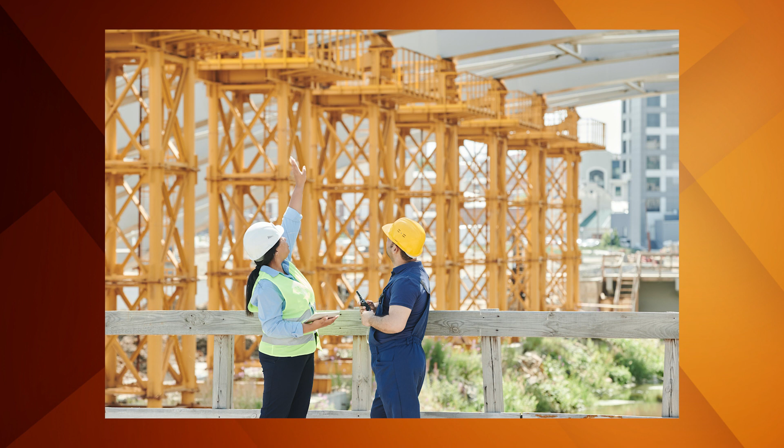They are usually the result of undue haste in getting projects approved and commenced in short time frames, with inadequate documentation which is not fully realised until well in the construction phase. Poor results are accepted at practical completion, as all the parties involved strive to finish what has not been an enjoyable experience and then move on. The poor results obtained are often explained away by suggesting there was some serious problem with the site soils and allegedly beyond anyone's control. So all parties take a loss in an effort to get the project completed.

How do we collaborate effectively when they won't listen? What we have to do is to make them want to pay attention. We have to offer them something worthwhile. We have to show them over and over again until it sticks. We know why projects get good results. When the right application is used, it is specific to the site we're working on.

Inland Rail Parkes to Narromine project, or P2N as we call it, is a great example of where these methods and processes have been implemented, achieving the results the clients expect. P2N outlines how VHR collaborated with the Australian Rail Track Corporation and the InLink joint venture between BMD Constructions and Fulton Hogan to determine and prove what was the right solution for the site to ensure initial and sustainable long-term grass growth was achieved in the poor quality soils. Large-scale civil engineering construction projects often have the problem of highly variable and poor quality topsoils.

We were contracted to revegetate the disturbed surfaces along some 103 kilometres of P2N's existing rail corridor, except for the capping, ballast rail and the single access track over a completed area of 2 million square metres.

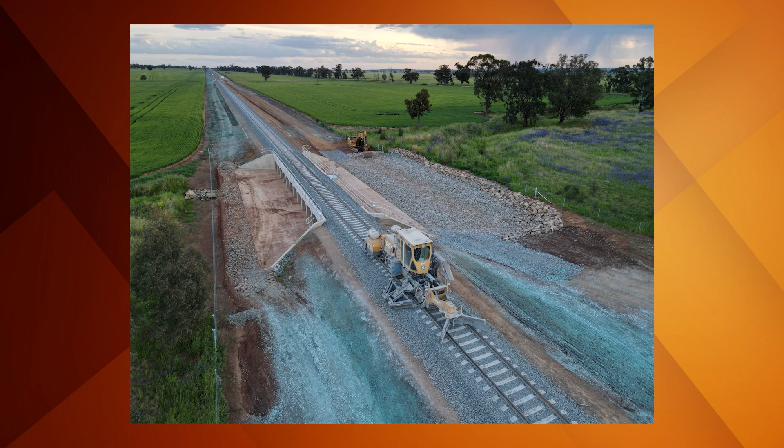Following acceptable results of the North-West link, the application methodology was adopted for the remainder of the works. The ability to ameliorate the soils in situ, along with preparing and covering large areas in a short time frame, became paramount in achieving program milestones.

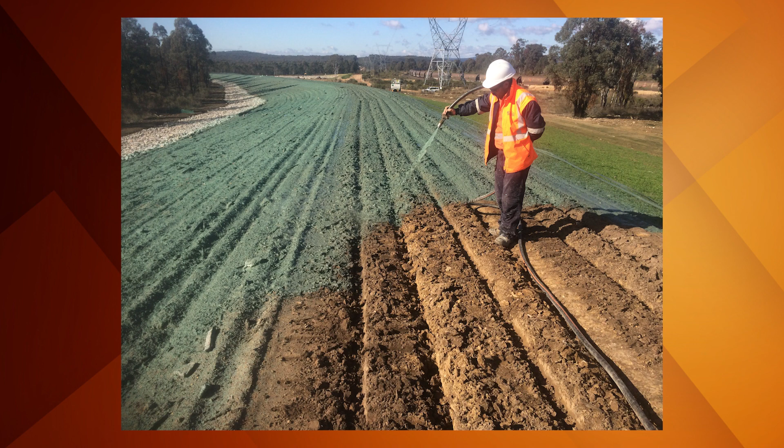The process and the method. The approach adopted was based on our experience on over 30 million square metres of applications since 2005. We commenced operations in 1981, and as our machinery and process developed, in 2005 we realised that results being obtained were unsatisfactory. So we developed a process and trialled it on the Brunswick Heads bypass. The trial was carried out collaboratively with the principal, the head contractor and ourselves, and the results achieved were acknowledged as one of the best outcomes for recent freeway developments.

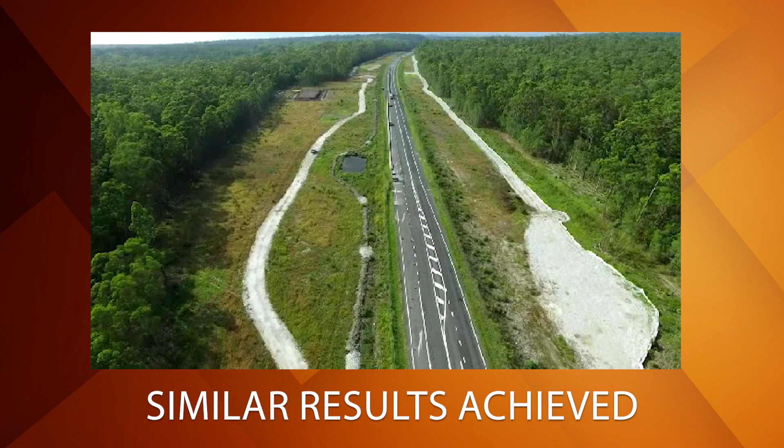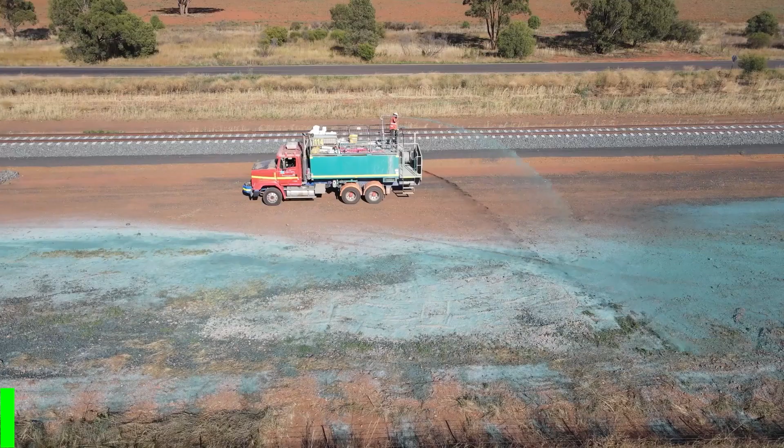The process was a simple one. Progressively testing the soils in locations over the length of the project where a variation in soil type was encountered and altering the mix to suit the results. Due to the scale of the project, it was not feasible to ameliorate in stockpiles, therefore the ameliorants were applied to soils in situ, requiring no manual or mechanical mixing in of ingredients.

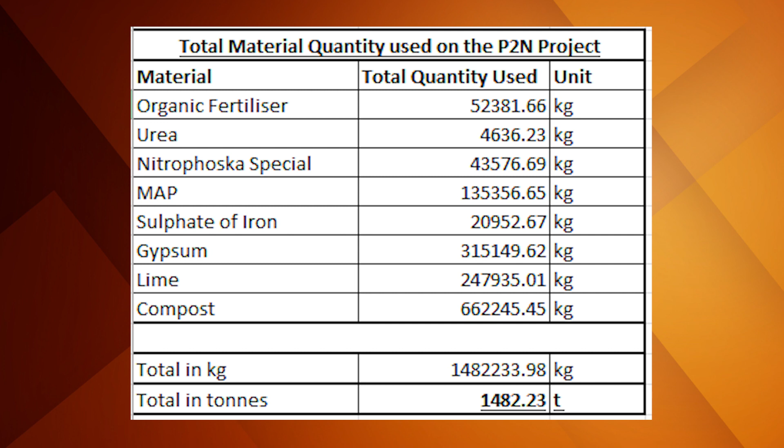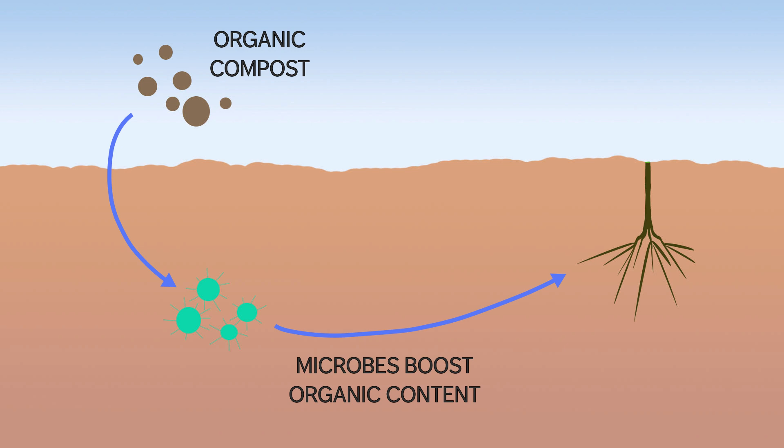This table provides data to give a better idea of the quantities required on this project according to the soil test reports. The application relied on the top-down approach in accordance with soil test results, and would incorporate fine and microfine ingredients to ensure penetration into the soil surface and to work their way down the soil profile as the root system begins development. This methodology saw the ameliorants included in the Hydromulch application infiltrating into the soil as rainfall was received.

All ameliorants and fertilisers used in this project are commercially available, such as microfine agricultural lime and gypsum and organic compost to AS 4454. Annual, perennial and native grasses, organic and inorganic fertilisers and other ameliorants as indicated in the soil scientist report were also included in the mix. Seed species and application rates for the project were developed in consultation with the ARTC and local agronomists.

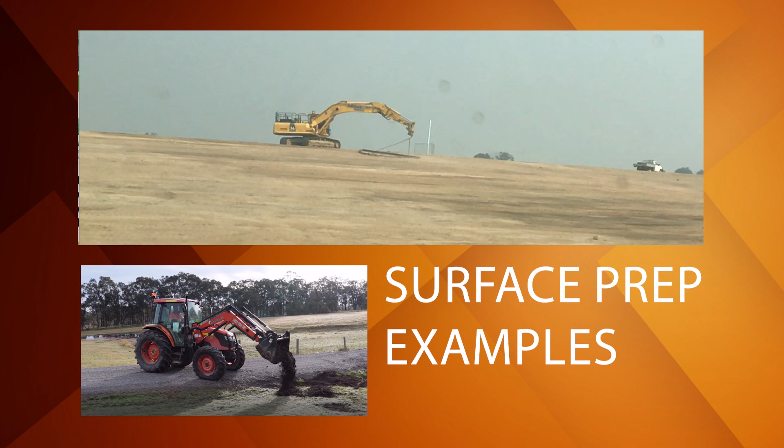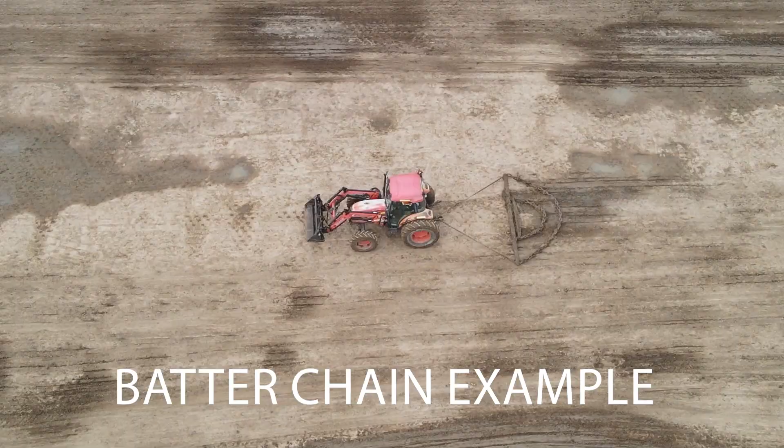Soil surface preparation was also an important part of the revegetation process. Site topsoil was spread on the furrowed, untreated subgrade in the revegetation areas and then lightly scarified to produce furrows parallel to the rail line to catch rainfall. Embankments on site were treated with a batter chain implement to loosen the topsoil to produce a moisture storage depth and leave furrows parallel to the contours for moisture retention and water erosion control.

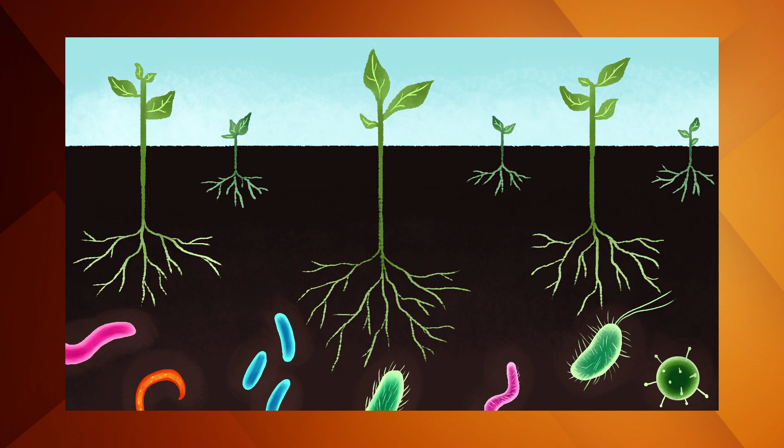This approach would ensure that not only the short-term annual grasses would germinate and stabilise the revegetation areas, but also that the soil structure would be improved as the applied ameliorants rejuvenated the soil chemistry and microbiology to kickstart the natural revegetation process and continue to support the perennial and native grasses in the long term as they survived and hardened up using the moisture stored in the loose topsoil layer.

The results. For the northwest link trial section, drought conditions followed the initial application in August 2019, and the application remained dormant on the surface for 3 months after initial application. Dust control was not required on the completed works, which were on the edge of the city with major roads and development immediately adjacent. When drought-breaking rainfall was received, the application washed into the surface, the annual grasses germinated, and as the annuals hayed off, the perennial grasses germinated so that a full grass cover developed by the end of autumn and the following April.

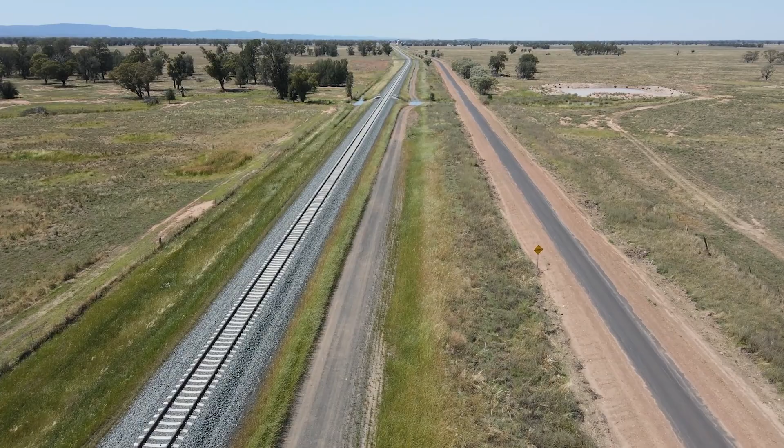Some of the revegetated areas suffered inundation prior to the grasses germinating, and when the waters receded after a week or so, the grasses germinated and developed a full cover of annuals and perennials without any rectification works. Results were monitored throughout the germination process by conducting drone flights over various sections of the project at different germination stages. All stages of germination were observed in the following stages of development on the grass cover.

The germination of the annual grasses is used to quickly establish cover on the surface and thus stabilise the revegetation areas to prevent erosion. Secondly, haying off of annual grasses following their development approximately 2 to 3 months following the initial germination. Thirdly, germination of perennial grasses which are used to provide more permanent stabilisation of disturbed areas. These events occurred while the grasses are haying off. Fourthly, germination of native grasses which occurred approximately 12 months following the initial application.

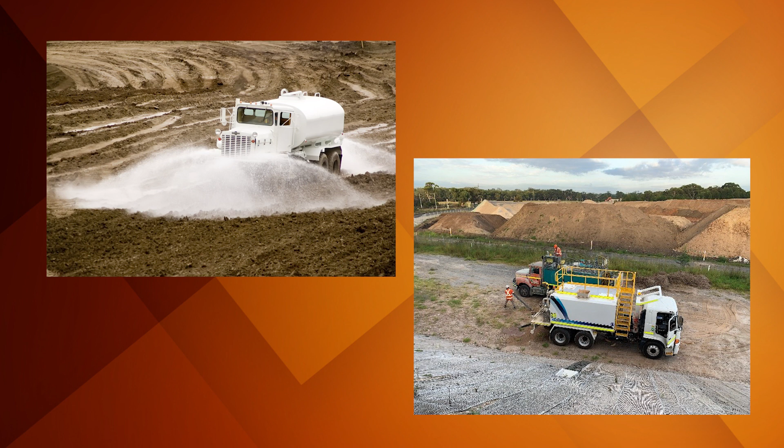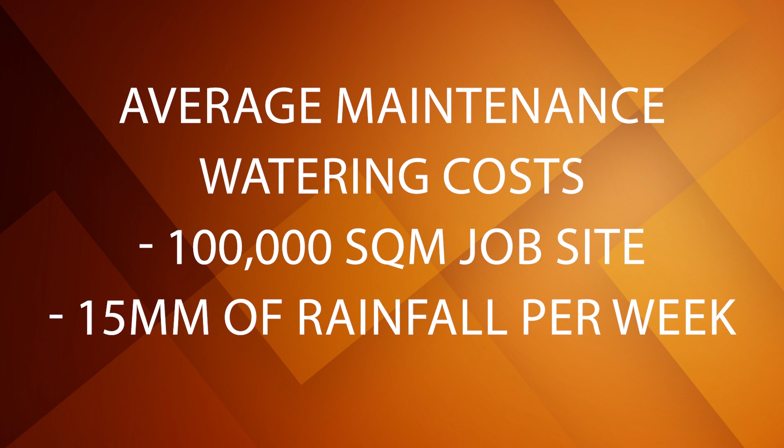Maintenance watering. Most revegetation specifications have requirements to water the application areas to aid the germination and ensure project slope stability at handover. If we effectively water these areas, what kind of costs are you actually looking at? For the east coast of New South Wales, we assume an area requires 10 to 15 millimetres per week plus evaporation. For the sake of this conversation, we'll ignore evaporation and look at 15 millimetres of rainfall per week. For a job size of 100,000 square metres, we need 1.5 megalitres per week.

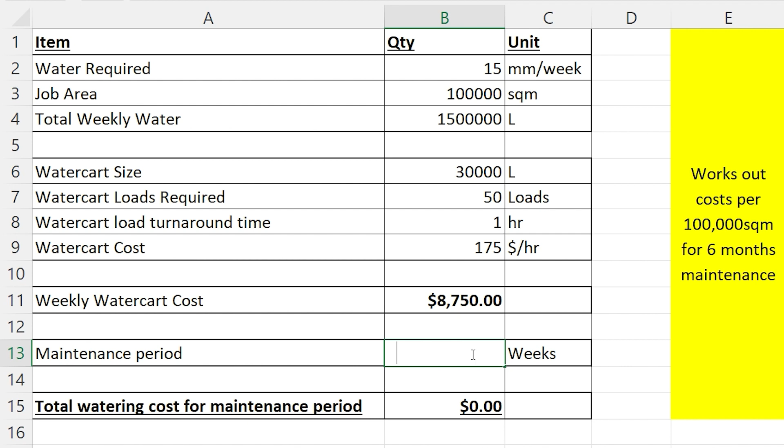For this arbitrary site, we're going to use 30,000 litre water tankers working on a 1 hour turnaround. This is 50 loads per week. Ignoring the cost of the water as it could be site won, this is $8,750 weekly or $227,500 for a 6-month maintenance period.

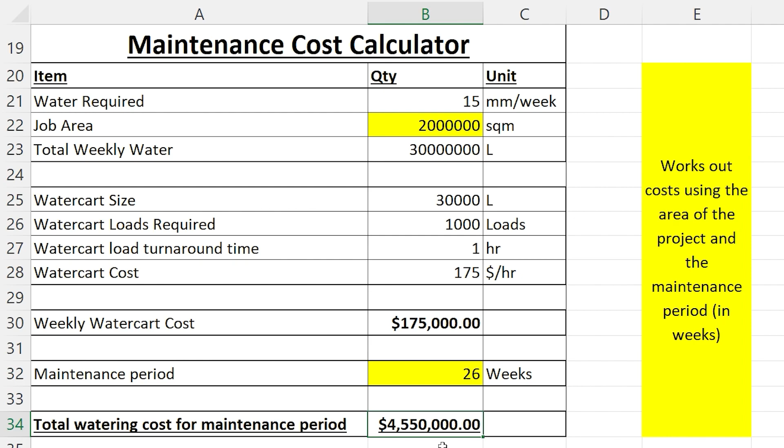The 2 million square metres of revegetation on the Inland Rail project was completed in 100,000 square metre blocks every 3 to 4 weeks depending on site progress. Due to the rapid program, this meant that up to 300,000 square metre blocks would have to be under irrigation during extended dry periods. This was logistically impossible, so a solution was required which would remain dormant on the surface until adequate rainfall arrived and would also not require maintenance.

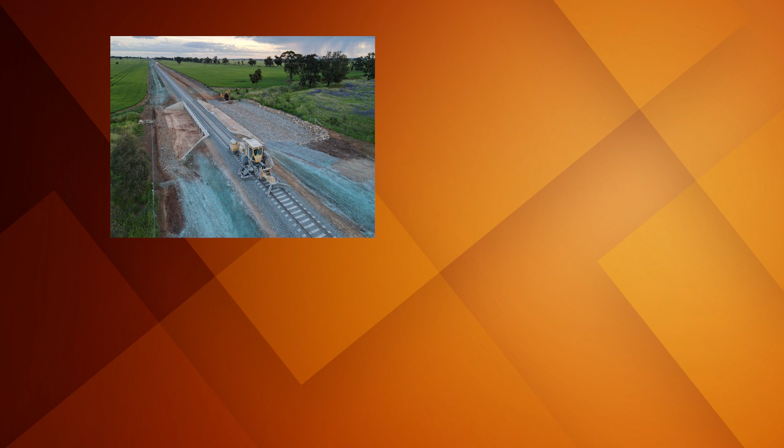Weeds. An application tailored to the site was developed with the ability to ameliorate the soil to effectively outcompete emerging weeds and sustain short and long-term cover. The applications on the project achieved both sustainable short and long-term growth and therefore stabilisation by ensuring the application suited the site soil requirements. These innovative applications can be applied to any site with poor quality topsoils and are particularly useful for control and growing sustainable revegetation. This feature substantially increases site sustainability.

Overall, a successful project result was delivered with client acceptance without rectification works at practical completion, or even during the 2-year maintenance period. This was due to VHR using a site-specific application, which also saved the client money by not having to carry out maintenance watering or rectification works during the maintenance period.

Maintenance costs can be hefty on projects, especially where the revegetation has not been very successful, introduced grasses not effectively suppressing emergent weeds. For example, let's look at a basic maintenance crew cost and work out 6 monthly maintenance figures. For this example, we will assume that no specialist equipment is required, with maintenance crews visiting the site 2 times in the 6-month period. Their works would be for basic maintenance, such as spot spraying and brush cutting, which is $70 per hour per person, plus $100 for incidentals.

The approximate cost for 6 months works out at $17,238 for every 100,000 square metres. This equates to 3 cents per square metre per month per 100,000 square metres. When you assess larger projects with longer maintenance periods, you can clearly see this figure for basic maintenance blows out to a large degree. For the P2N project, the savings on maintenance for the 2 million square metre and 6-month maintenance period were in the order of $300,000.

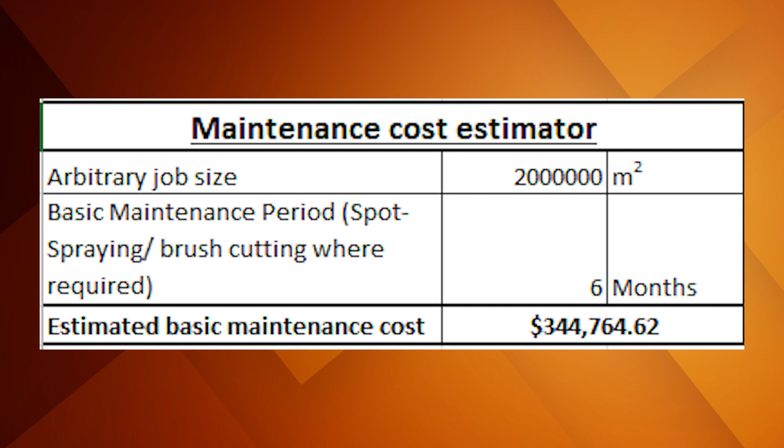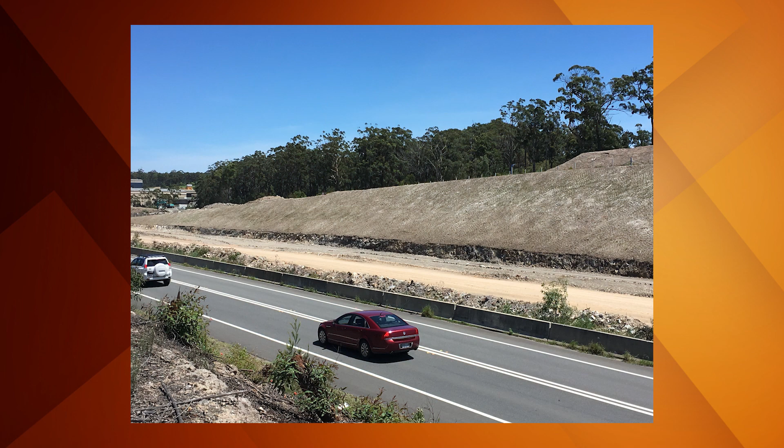The second project we've included in this discussion is the Oxley Highway to Kundabung project. Site works began on the Oxley Highway with a standard RMS Hydromulch application. This application, however, failed due to limited fertiliser in the mix, which offered very little in the way of providing the required nutrients deficient in the soil. Also, the standard R178 application assumes an ideal topsoil, which is rarely available on civil construction sites.

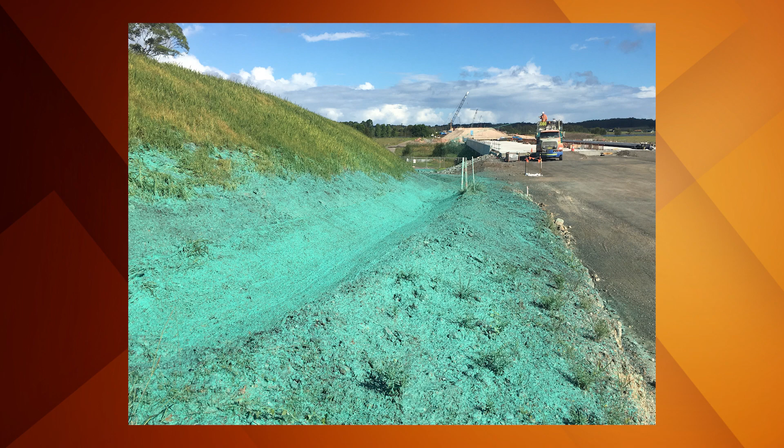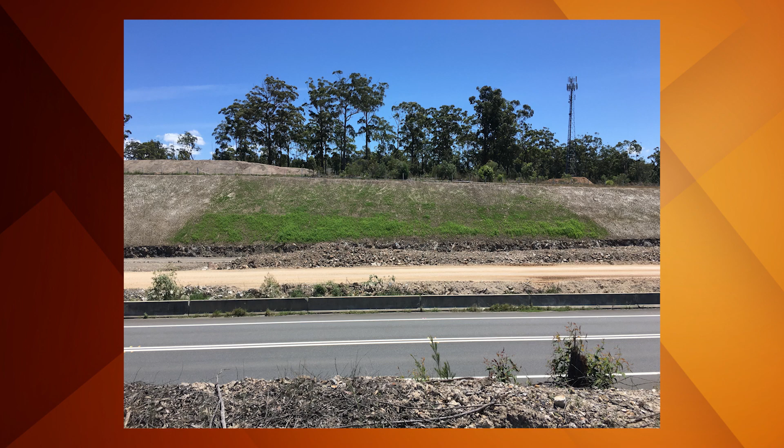Initial seeding works up to the 21st of August 2015 were carried out in accordance with specification requirements, and results were poor in that germination after rainfall was patchy, and the grasses after the initial strike exhibited signs of severe stress after initial germination, with growth to about 50mm height, when grasses generally turn yellow before dying back, leaving extensive bare areas after about 2 months. Surviving cover crop grasses became colourless and spindly before eventually haying off, with weeds then predominating.

On our own initiative, in early July 2015, we took topsoil and subgrade samples for testing and experimented with various combinations of emulsions and monitored results. From the results and recommendations for these site soil tests and our experience since 2005, a site-specific application was designed. The site-specific application included Hydromulch to R178 specifications, plus an additional approximately 7,000 kilos per hectare of fertilisers and ameliorants. Microfine ameliorants were used to improve the solubility, to increase the rate at which they were absorbed into the topsoil and through to the subgrade.

The intention of this ameliorated application is to stabilise the soil by improving soil structure, increasing the macro and micronutrients to stimulate plant growth, while also boosting microbial activity. This led to improved nutrient release from the site soils for recycling to sustain long-term germination and development of the grasses and natives. The site topsoil was deficient in calcium, nitrogen, phosphorus and potassium, with very little organic content, resulting in poor microbial activity and nutrient recycling. Site wood mulch initially was also mixed in with the topsoil, which resulted in a nutrient drawdown, again not compensated for in a standard application. Inorganic fertilisers and ameliorants were a necessity for these soils to stabilise the soil surface and promote healthy germination.

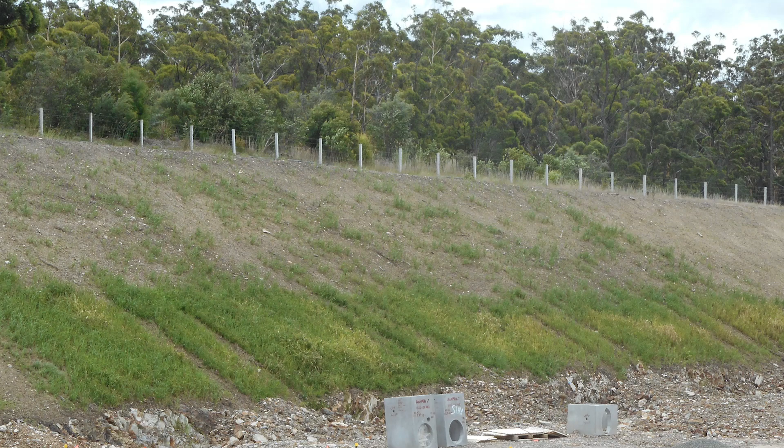In areas where the standard application had been used, the annual grass germination was patchy and the emerging grasses yellowed and died off very quickly due to ineffective additives applied to the topsoil in the standard R178 application. This premature yellowing of grasses can easily be noted on many highways and freeway revegetation projects. It is easily recognisable and relates to the lack of appropriate fertilisers and ameliorants in the application used, which is not site specific.

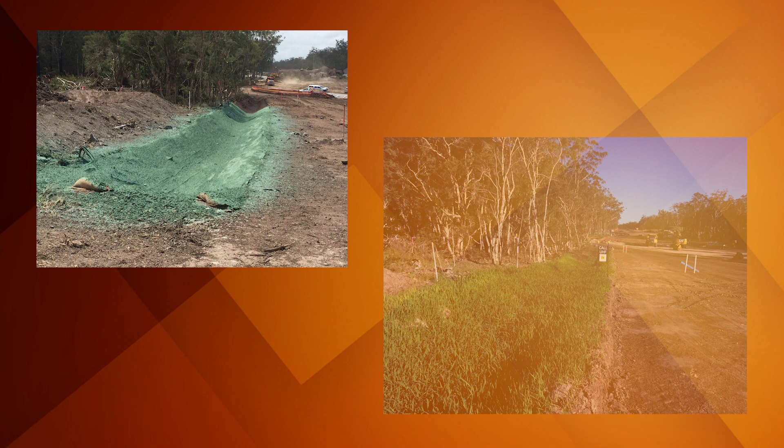After the standard application failed, the head contractor instructed that the site works treated with the standard Hydromulch application were to be retreated with the ameliorated application, which became the adopted choice for the remaining revegetation works. The comparison in results showed the ameliorated application to be successful on site, stabilising the soil, establishing effective erosion control and promoting long-term germination and plant development. We note that the AS4454 organic compost is an important part of the long-term revegetation process to rejuvenate the microbiological process for long-term plant development and carbon absorption.

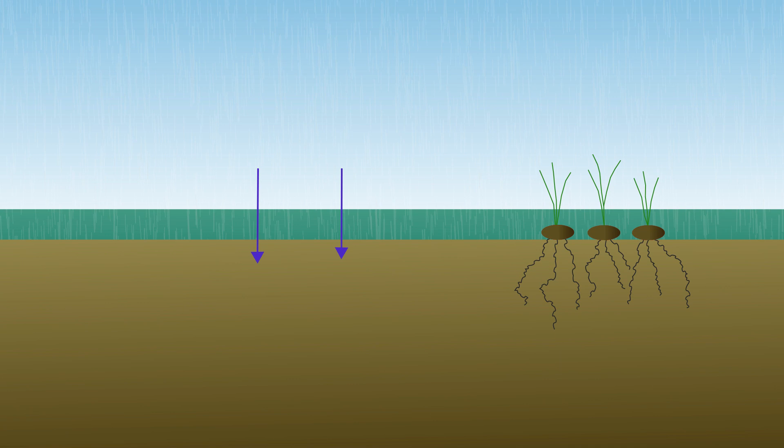We also note that performance of the application relies on adequate rainfall, which washes materials into the loose surface. Once the ameliorants have infiltrated into the soil, grasses can begin to germinate and results are seen. The works on site have shown that the ameliorated Hydromulch application can withstand heavy rainfall without failure. The application itself will remain dormant on the surface until adequate rainfall arrives. The purpose of utilising fine and microfine materials in our application results in faster absorption into the topsoil surface. Our applications have a tendency to wash in rather than wash off batters following rain events. Due to the increased absorption rate of these materials in comparison to standard conventional hydromulch, our applications tend to establish at a faster rate.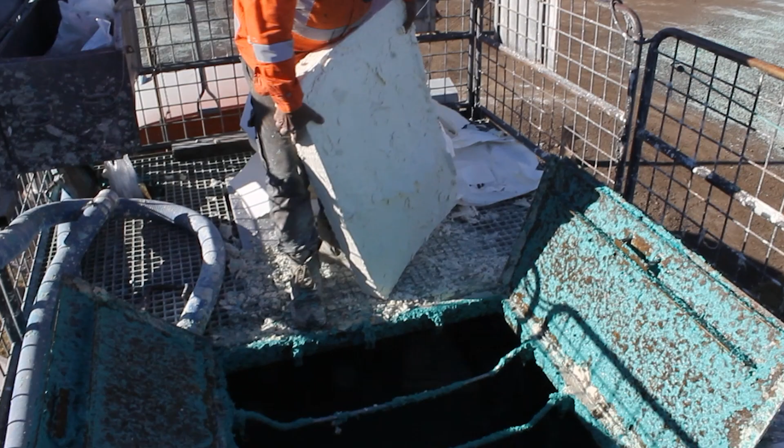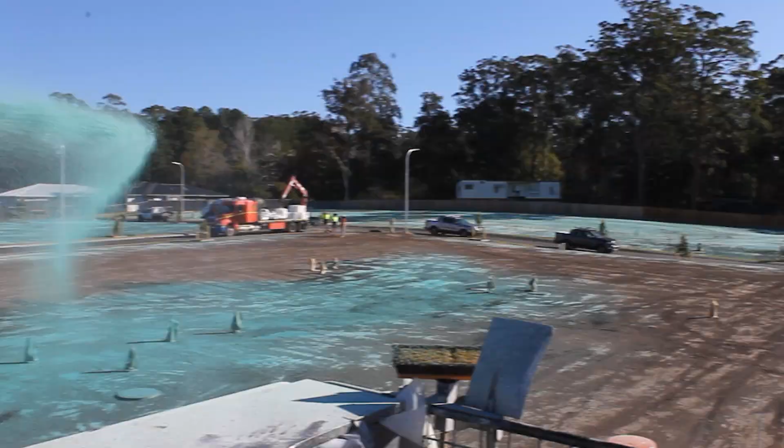Polyacrylamide binder is used to bind the wood fibre and application ingredients together to form a paste bound into the soil surface, thus providing erosion protection for the topsoil until adequate rainfall for successful germination begins. The polymer binder is re-wettable so that it does not form an impervious layer on the surface, restricting the leaching of water into the loose topsoil.

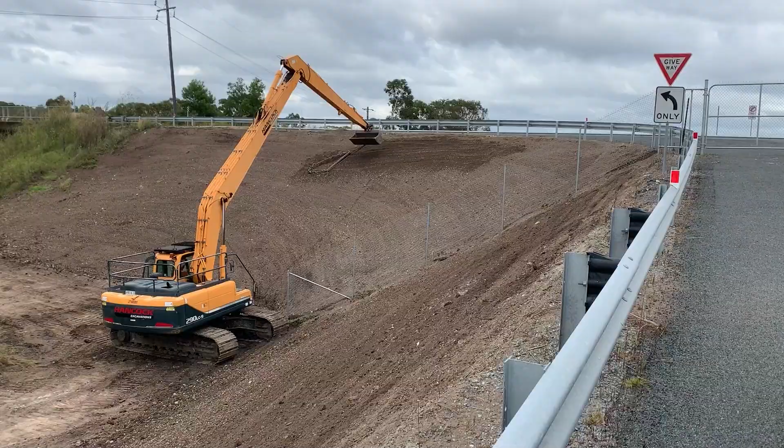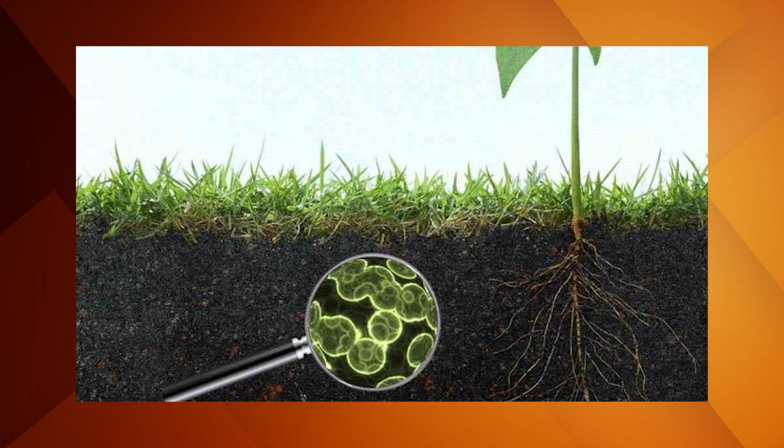Site works were also required to be scarified prior to application, providing the essential loose and roughened surface for seed and ameliorant penetration. A correctly prepared application area will always exceed the performance of a poorly prepared area. This comes with a minimal cost when completing trimming works in comparison to reworks. Good preparation will provide the best results and ultimately the most effective erosion controls and stabilisation methods. This allows rainfall, seeds and ameliorants to penetrate the soil surface and establish an effective cover. Grass root systems can establish, providing effective erosion control. Ameliorants are efficiently improving the soil structure, microbiological activity and nutrient cycling, and working towards restarting the natural revegetation process.

To recap, an understanding of how results are achieved and acceptance of specification feasibility are both crucial for any project.

It will save money by not having to complete reworks or carry out any maintenance watering, rectification for practical completion or during the maintenance period.

An example of how using insufficient applications can cost you more in the long run can be shown in this table. The project was on the Pacific Highway where the soil was tested and applications were developed according to the results. However, the contractor elected for a cutback application for some of these areas instead of following the soil test recommendations. By the end of the projects, some of these areas had been sprayed 4 times and repeat applications were sprayed with the same standard application up until a result was achieved.

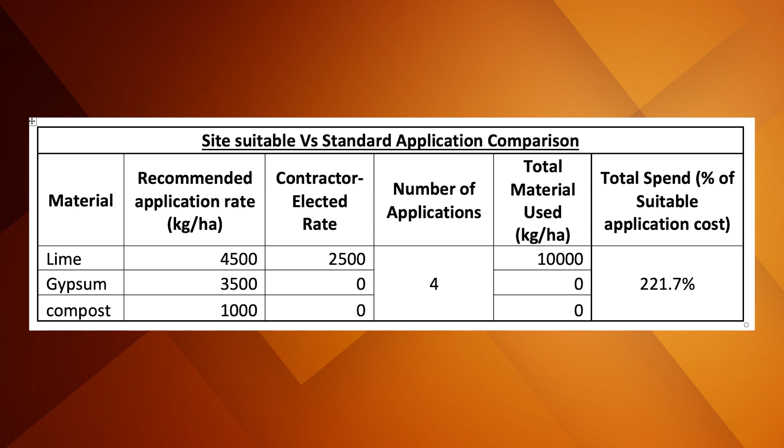Curiously, this was when the calcium content of the repeat applications exceeded the quantity required following soil analysis. As for costs, the table shows the total spend from the contractor as a percentage of the cost of revegetating in accordance with the site-specific soil testing. It costs the contractor in excess of 200% of what it should have. If they had followed the soil test recommendations and chosen the right application at the start, they would have saved themselves time and money spent on re-spraying these areas repeatedly.

Weed seed is present in all topsoils and is the natural process for weed generation, which is the stabilising part of the natural regeneration process, and usually includes the uncontrollable proliferation of weeds by wind-blown seed from established weed colonies immediately adjacent to the works. Therefore, the most effective form of weed control is by competition from perennial grasses and native plants. So it is essential that full cover of perennial grasses is established early in the revegetation process to prevent weed development.

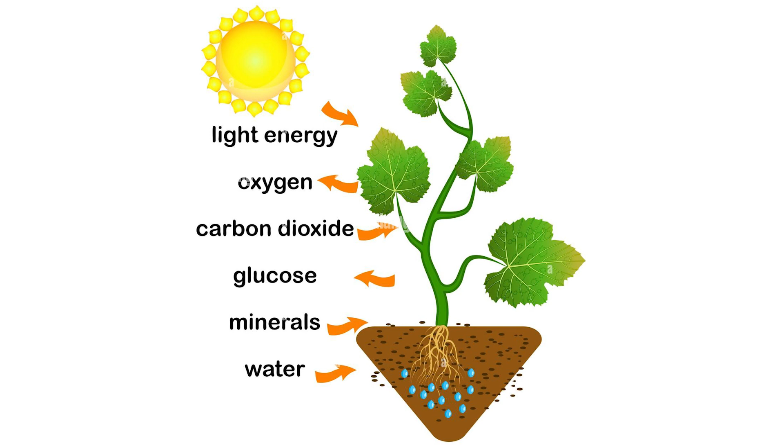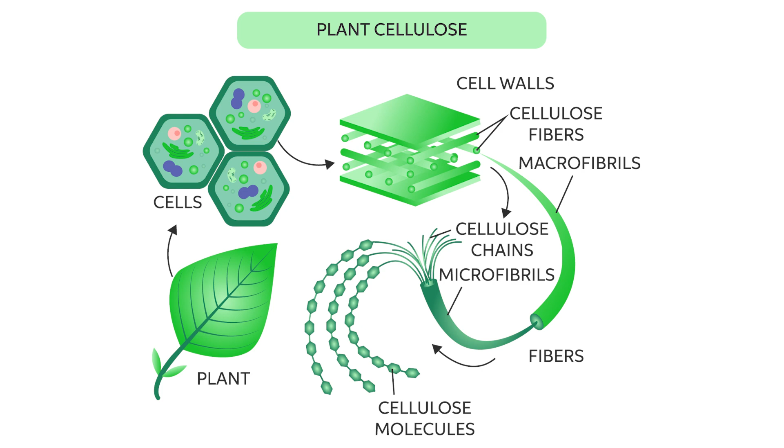The importance of the introduction of microbe-rich compost. Plants use the energy of the sun to change water and carbon dioxide into a sugar called glucose. Glucose is used by plants for energy and to make other substances like cellulose and starch. Cellulose is used in building cell walls. Starch is stored in seeds and other plants as a food source. To fuel growth and division, bacteria need to find their favourite food and be able to digest it completely. Their food of choice is a simple sugar called glucose.

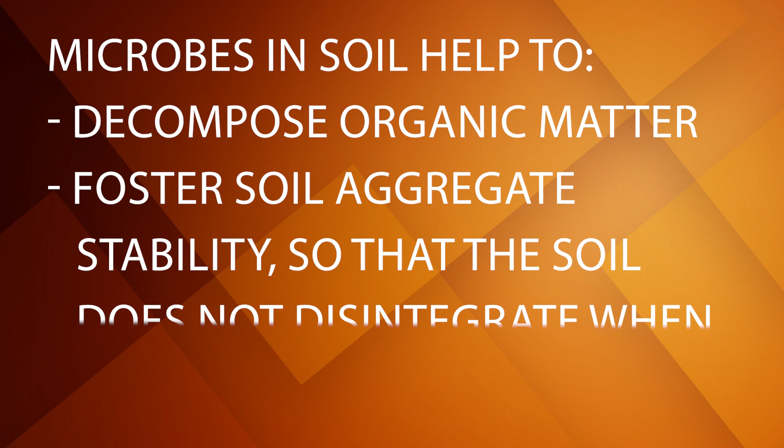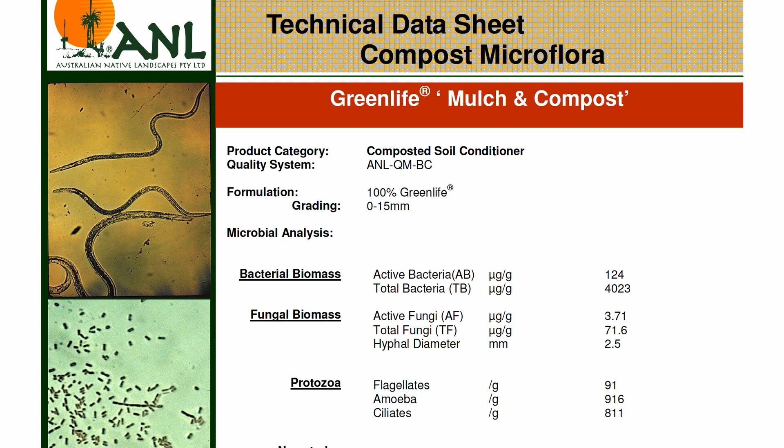Microbes in soil help to decompose organic matter, foster soil aggregate stability so that the soil does not disintegrate when flooded, and so increases its water holding capacity. Recycle and regulate carbon, nitrogen and phosphorus. Fix nitrogen for plant uptake. Increase the available plant root area for nutrient uptake. Degrade pesticides. Improve soil structure and help control diseases. Compost on its own cannot restart the natural revegetation process. It needs help from fertilisers and ameliorants to address deficiencies in the soil chemistry and improve the soil structure.

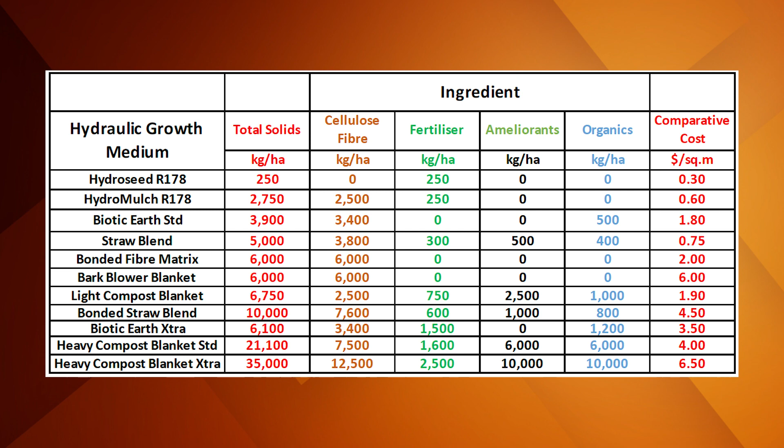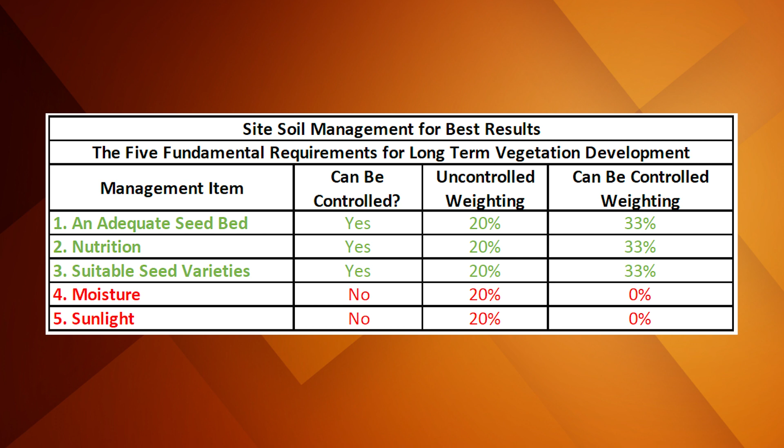The chart on the screen is a comparison of the solids content of the various hydraulically applied growth medium based on information available. Gypsum is a recognised clay breaker, and post-application test results indicate that it can penetrate to a depth of 300 millimetres in about 3 months, taking the microbes, fertilisers and ameliorants with it. The compost conditions the soils to provide an abundance of food for the microbes so that they can provide moisture and essential nutrients to the plants in the long term. It follows then that the greater the amount of the various solids introduced to the soil, the sooner the natural soil rejuvenation process will begin and the longer it will develop due to the abundance of food which becomes available to the microbes.

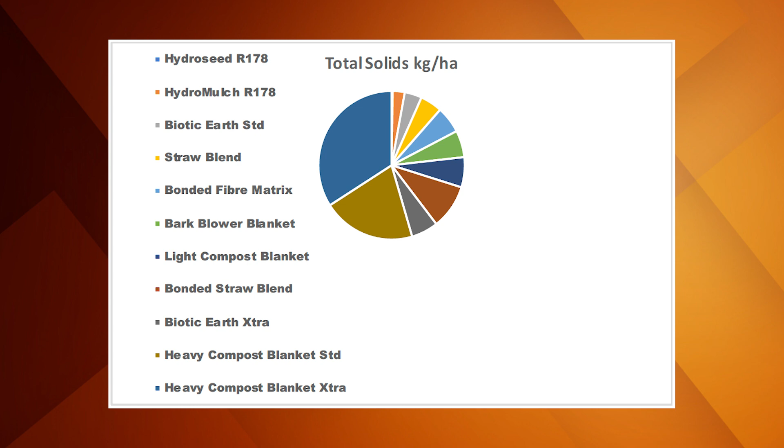The one thing I really want to reinforce is the cost-saving benefits of using a site-specific application. Imagine driving yourself on the site for an inspection and the grass is nice and green and growing well. The client is happy and you don't have to do any reworks or maintenance. It's a nice feeling, no worries or cares, everything is running smoothly and you can give yourself a pat on the back for a job well done. So what will save you money on grassing in poor quality soils? Again, it's simple. By using a site-specific application, the grass will grow sustainably, reducing the need for reworks and maintenance, and in return reducing costs and emissions.

Being in the industry, we need to realise that the old ways don't work anymore. If we continue using products that aren't sustainable, then not only will it cost us more money in the long run, but we are just going to keep hurting the environment as well. It's up to us to be the leaders and provide new ways of doing things which are sustainable and leave less of an impact.